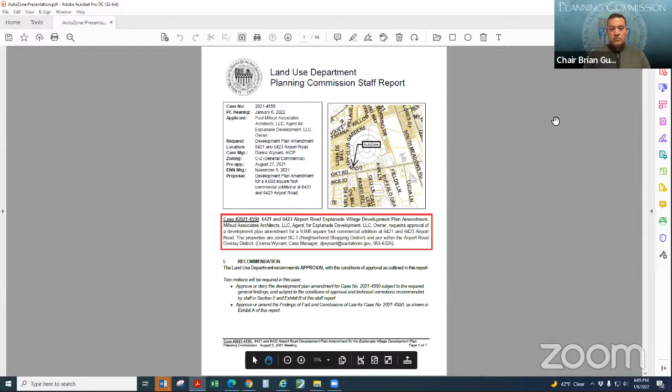Okay, yes, this first case this evening is case 2021-4550, which is 6421 and 6423 Airport Road, Esplanade Village Development Plan Amendment. Mifsud Associates Architects LLC, the agent for Esplanade Development LLC, the owner, requests approval of a development plan amendment for a 9,000 square foot commercial addition at 6421 and 6423 Airport Road. The properties are zoned SC1, a neighborhood shopping district, and are within the Airport Road Overlay District. Staff recommends that the Planning Commission approve this case with conditions of approval as outlined in this report.

Two motions will be required in this case: approval or denial of the development plan amendment for case number 2021-4550, subject to the required general findings and subject to the conditions of approval and technical corrections recommended by staff in section 2 and exhibit B of the staff report. Also, approve or amend the findings of fact and conclusions of law for case number 2021-4550 as shown in exhibit A of this report.

There's only one condition of approval from our DRT on this, regarding bike parking or bike racks. The development plan approval criteria, staff found that these criteria were met; there are 3 of those in the report. So the expiration of this case, should you decide to approve it this evening, is January 6th. That gives them 3 years from the time of final action. If you make that decision this evening, January 6th, 2025 will be their expiration date.

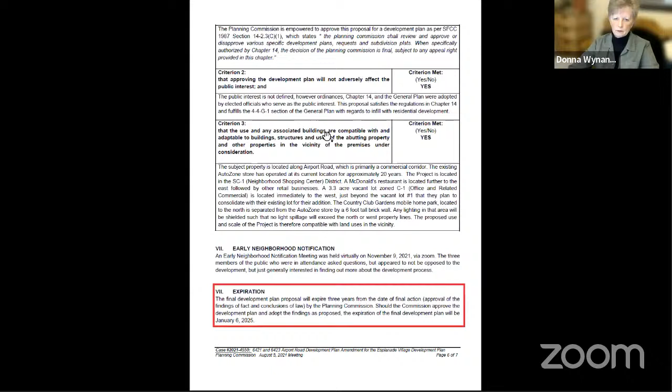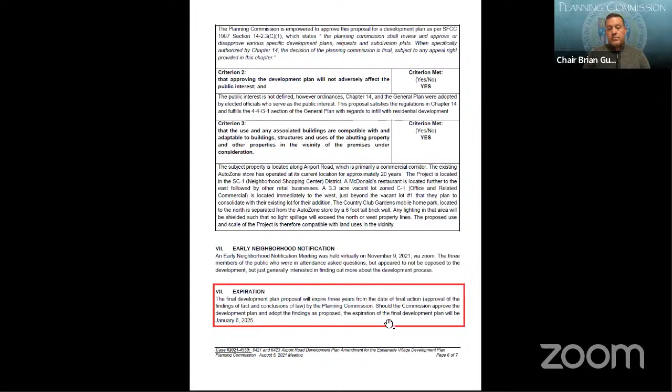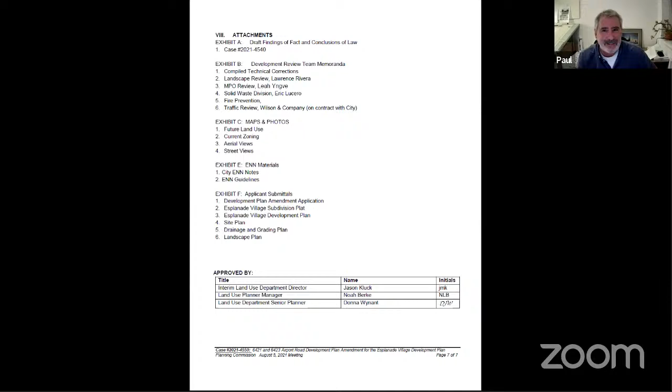I am here. I was kind of expecting my clients to be here also, but I guess they're busy with other things. So as Donna described, this is...

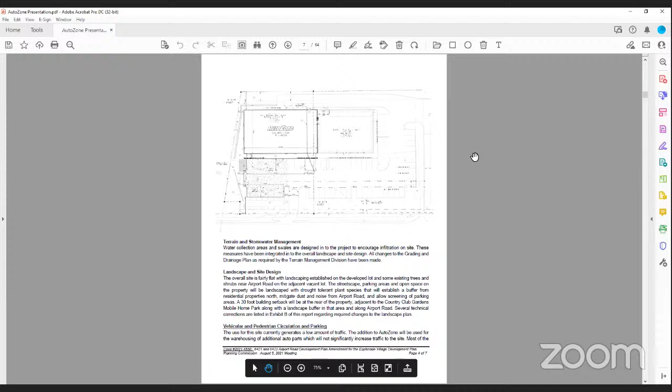It's just a basic site plan of AutoZone. Okay, yeah, this is a bit faint, sorry about that, but if I could just point this out, this is Airport Road and this is Paseo del Sol at the intersection with the light. And you have the new McDonald's over here. The stretch of this development is several properties. It was at one time, when first developed, one shopping center, and then the proposal was to subdivide it because people did not want to be without their own fee simple lot to sit on, and they have joint parking arrangements in between. Essentially, this is the proposal, the existing building here with their existing parking.

You can see it's double loaded here. You come in from the Paseo del Sol that extends up here beyond the traffic light. And so you have this amount of parking. Forget how many spaces that is, but it has plenty of parking. This is the new parking here.

So this right here, there was an attempt with this overlay to try to make it a little bit more unique for Airport Road, to have the buildings closer up to the street. I think there was even at one point discussion on staff, hey, how can we do things really different and not have all this parking in the front, maybe just allow them to have a single lineup of parking. So you see that at some of the new buildings being done along Airport Road, but this is existing. This is proposed here.

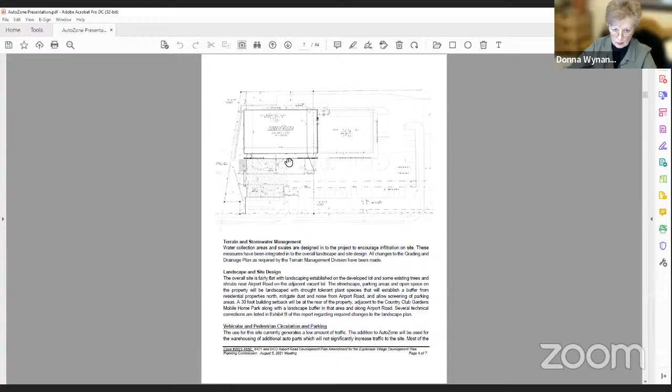And so they have a number of vans that will stand ready to deliver those to people, probably as they're stranded in their driveways or on the road somewhere. They just call and they'll deliver. So I don't know how unique that is. There's probably some other businesses that might do that, but that's essentially the essence of the proposal.

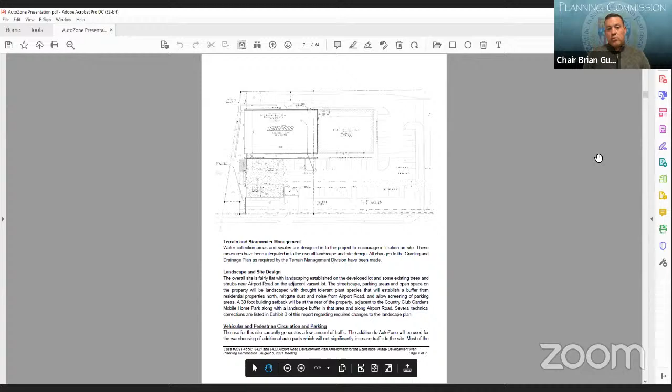Is there anything you have for the entrance, on the westernmost entrance? Right now it's dangerous, and when people miss the lighted entrance, and that one is a right-turnout only, it causes trouble on Airport Road. So has that been addressed?

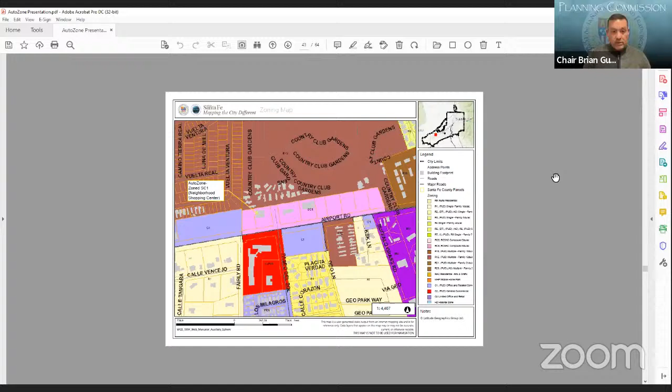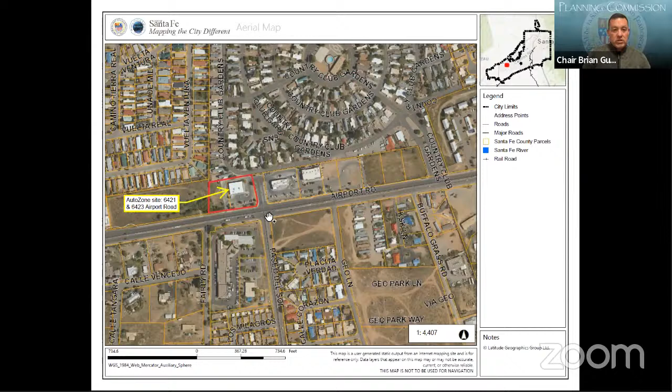You're talking about, can you see this here? This is the zoning map. Yes, we can see it. Okay, all right. This intersection here with the traffic light, it was adjusted some, and I'm not sure what all the issues are. If you go to the exit, which is kind of by the yellow arrow right now. Okay, yeah, that's a problem right there.

Here's a Google Earth shot I did. It comes from a different angle, looking west, bird's eye view down towards the existing situation. So you're talking about this right here? Yes, because that's a right-out only exit. If people miss the light to get into the actual place, they try and go in through there, and it's a safety hazard at this point.

I've seen accidents and things happen right there. So I think that's something that, if it has not been addressed, needs to be addressed. Okay, thank you for pointing that out, Chair.

I think with this median here, it at least closes that off. So if people are going in there, they're coming all the way here and then turning down this, going head on to this traffic here and then down here. Is that what you're saying is happening?

If they're headed west down Airport Road and they pass the McDonald's and they pass the entrance to AutoZone, they're trying to get into the AutoZone. It's designed as a right-out only, but they're still jumping the curb to try and get into the facility and slowing down abruptly, and it turns into headaches and accidents. So with this new renovation, I think that's an issue that needs to be addressed.

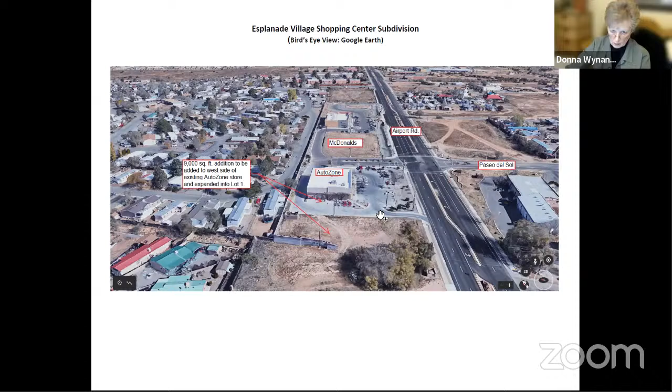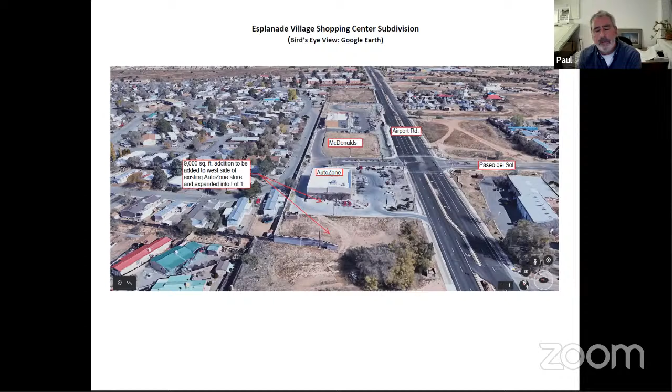Thank you for pointing that out, Chair. This is Paul Minson again. As I recall, that was required by fire and trash, so that they wouldn't have to turn around, so that they'd be able to go in and then get out. And the city traffic engineer required it to be a right-out only and no left-turn in. That's the history of it from 2009.

Right here. Yes, okay, well, it's right here. What you're talking about, yes. Excuse me, yeah, you can see they jumped the curb right where your little hand is, and try and get in there. And it makes for unsafe conditions. So I just want that pointed out for the record.

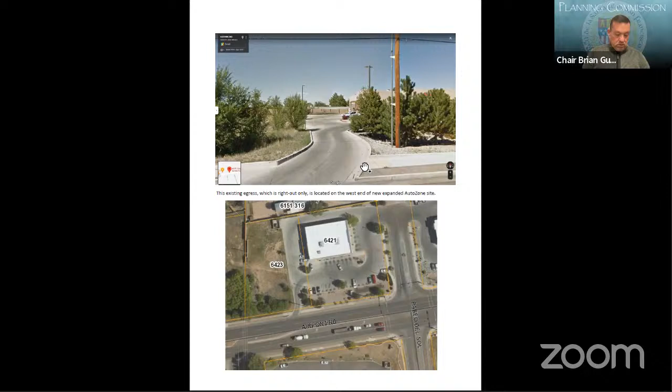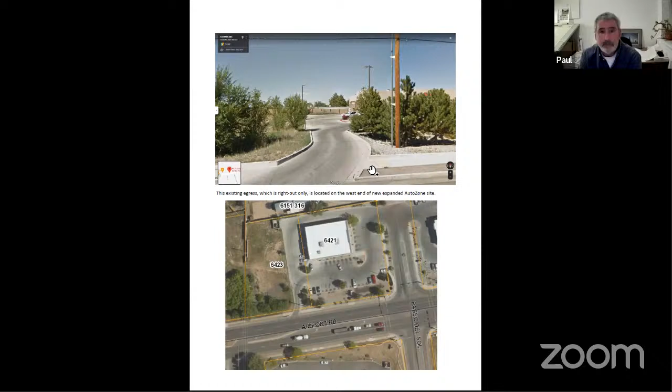I appreciate that, Chair, and I will make a note of it. When this goes through the development review team, the DRT, maybe there could be an exit-only sign there, and maybe something that would physically discourage that more. If it could be addressed, I just want to bring attention to it.

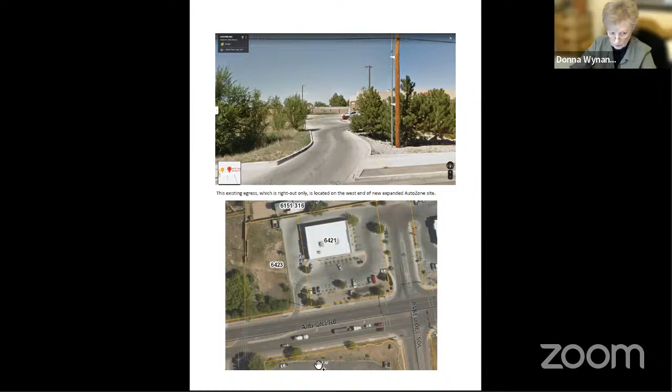I do see one hand up in the attendee room, and it's a call-in. Dan, let me reopen the public hearing real quick just to make sure this isn't for this case, and if it is, let him speak since it's a call-in. This is for the phone number ending in 4950. You will have to unmute your phone to speak. Good evening, are you calling in on this case we're discussing right now? I think it was the other phone number. They're both talking, yeah, pardon me, they're both here. Try star 9 on the telephone, that should unmute you.

We have one that's unmuted successfully, but the one with the hand up is not unmuted just yet. Dan, what's that other number end in? We have a phone number ending in 8043, that's the one with the hand up. 4950 does not have their hand up. 8043, if you want to speak, press star 9 and that'll unmute you.

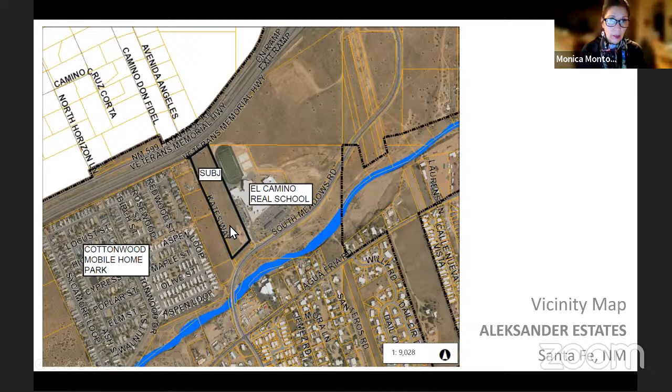Okay, so subdivision design. This is just a blow up of that 8.4 acres of land, and this drawing intends to show you the layout of the subdivision of the 59 lots within the subdivision.

It has a loop, and this loop is designed to access 2 rows of lots. On the east side of that loop, we're going to call that Aleksander Road. This is Kate's Way here that goes up to South Meadows Road, and this will be the front access to this row of homes right here.

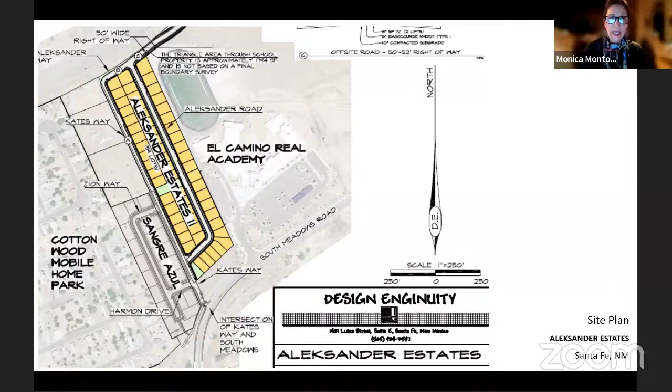Kate's Way presently serves as access to these vacant and partially developed residential lots, as well as Sangre Azul, the main access to a residential subdivision to the west of our project on the west side of Kate's Way.

There will be 2 access points to the subdivision, if you may recall. One is Kate's Way as one access, and a secondary access from the north end, the northeast end of the subdivision, through a small corner of the Santa Fe Schools property and through the 30 acres owned by the state of New Mexico and leased by the city of Santa Fe. This road will be dedicated to the city of Santa Fe for its use in its efforts to develop this 30 acres of property for economic development purposes.

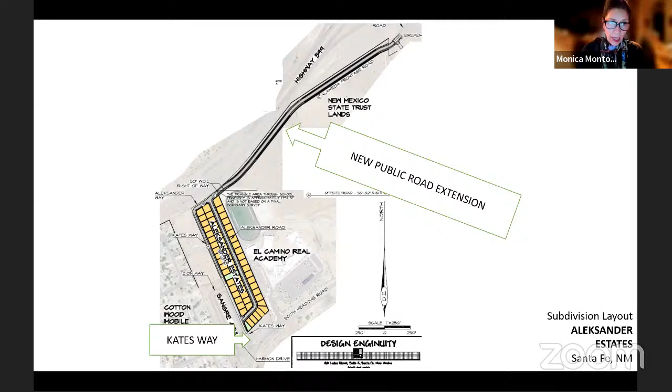So this right up here, this is going to be the connection. We're building this road here to connect to an existing road, which leads to an existing roundabout, the existing South Meadows Road roundabout. I'll show that to you a little bit better on the next slide.

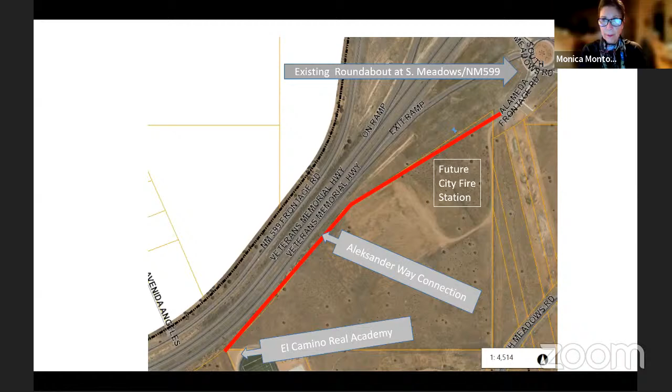We do already have in possession easement agreements with the Santa Fe Public Schools and with the state of New Mexico, and our intent is to build the road and dedicate it to the city of Santa Fe for its use.

So as Donna mentioned previously, there are some staff conditions attached to the design of the project. We've worked extensively with all of your development review team staff throughout the design process. We've made some revisions to the original plans specifically for the city's benefit.

One specifically, we modified the right-of-way design along New Mexico 599 to accommodate a 10-foot wide pedestrian trail, which will be constructed with asphalt. We also modified our design to add a sidewalk connection from the southwest corner of South Meadows Road to our project. We will be extending utilities to one neighbor on the west side of Kate's Way to her property.

And then we will take care of any red line corrections that your staff has gone over with us.

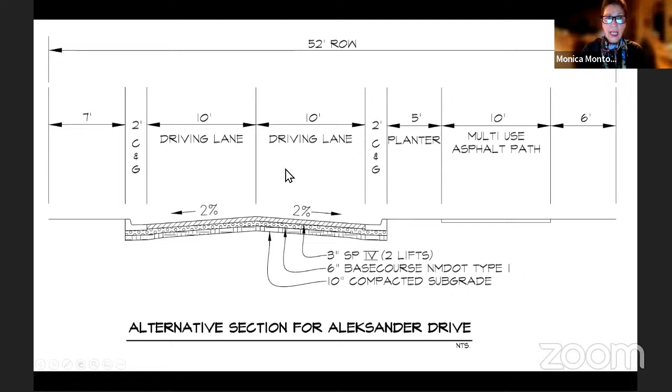So just to show you what that design is going to look like, this section here pertains to the road we will be building parallel to New Mexico 599 in the city of Santa Fe's leased area. You can see here, we've added a 10-foot multi-use asphalt path, which can be used for pedestrians, bikes, or just about any way to get folks through the property for recreation purposes. It'll have a 5-foot planter, curb and gutter, 2 10-foot driving lanes, and a 7-foot shoulder.

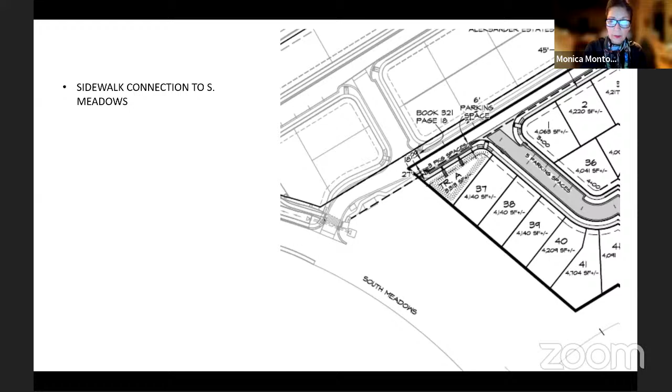And by the way, both of the designs from Aleksander Way, which is the connection through the city property, and the connection on the south that I just showed you, were requests by your MPO staff.

For recreation. So now I'll briefly go over the architecture with you. This will be somewhat redundant, you guys have seen this before, but if you'll indulge me for just a moment, I'd like to show you the type of quality work that Next Generation Contracting Inc., my client, does in the city. You can expect the same here in this subdivision.

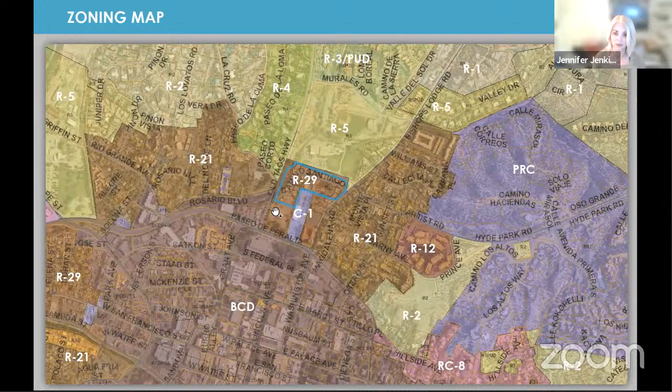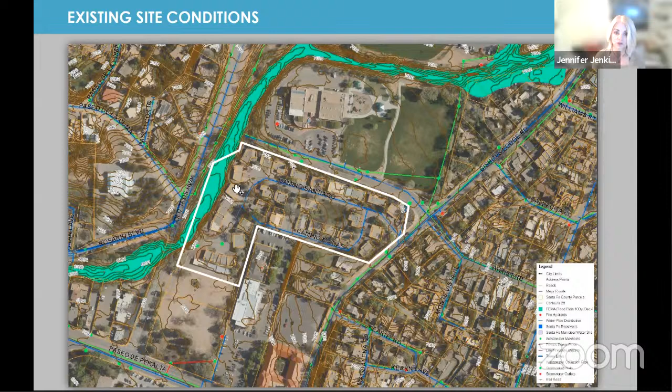This is an aerial of the site, showing some floodplain with the Arroyo Mascaras that moves adjacent to the property on the west. There's an existing public water line that serves the property. The property is also served with on-site private sewer.

These are the existing structures on the 6.6 acre parcel. As I mentioned, primarily detached homes, but there are a couple of duplexes and 3 fourplexes. There's a garage structure here that will be demolished. The demolition of that structure has already been approved by the Historic Districts Review Board.

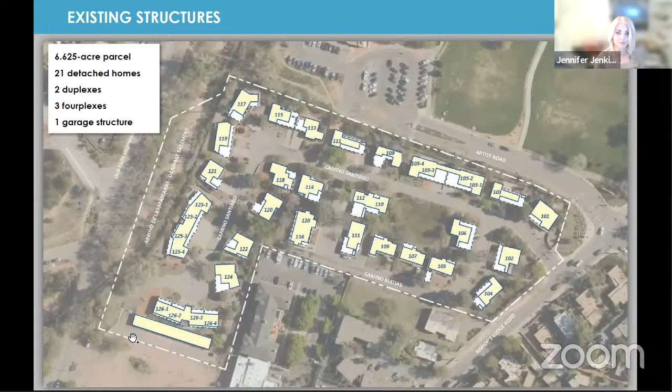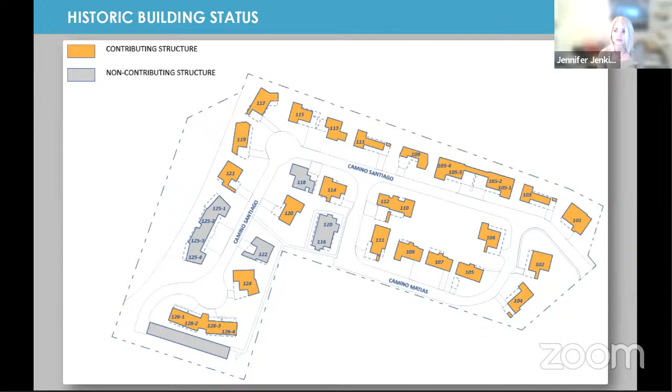The structures shown in gray are considered non-contributing. The renovation of these creates a little more flexibility in terms of how renovations and additions are able to be implemented, but is still subject to the jurisdiction of the Historic Preservation Division.

There is a lot of lovely mature vegetation that we have gone to great lengths to preserve. As I mentioned previously, we have two access points. The main access point is off of Bishop's Lodge Road, and we have secondary access via an easement across the neighboring property to the south, directly out to Old Taos Highway.

We are proposing some infrastructure improvements as part of the subdivision that include a replacement of the on-site private sewer system and improvements to the on-site roadway. We are adding sidewalk improvements.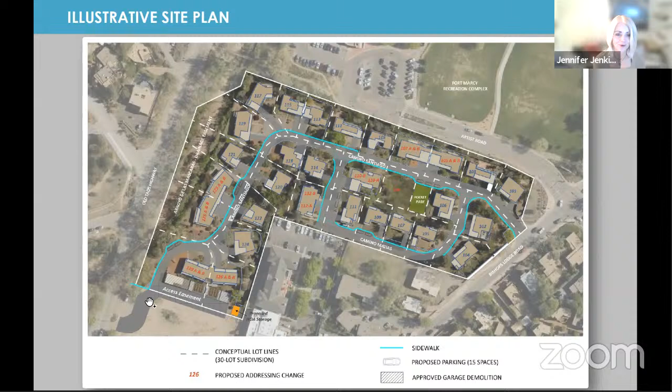So as I mentioned, there are 27 existing structures. We are converting the fourplexes and duplexes, which would be 8 homes that would have an attached guest or accessory dwelling unit, or mother-in-law unit if you will, as part of that dwelling. And then, of course, the creation of the one vacant lot. So we have a total of 30 dwellings.

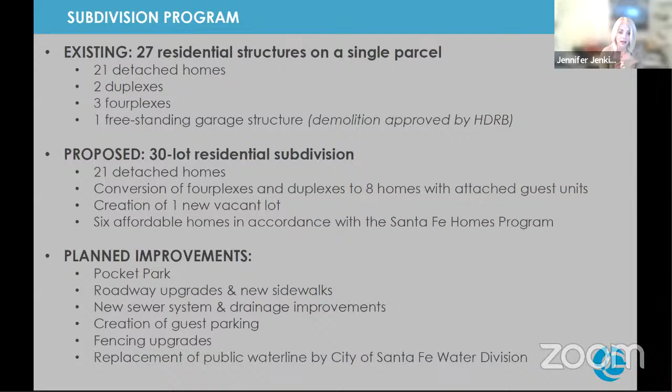And the planned improvements, as I mentioned, are the park, the roadway upgrades, the sidewalks, the sewer system. We also are doing some drainage improvements, the guest parking, upgrading some site fencing. And the City of Santa Fe is actually planning a replacement of the existing public water line on the property as well.

And we are working directly—we've had some outreach already with existing residents. Our goal is to convert as many of the existing residents to homeowners for those who are interested in purchasing a property as part of the project, and also really specifically with the affordable homes.

I was just exchanging emails with a resident earlier this week. We invited and encouraged everyone to reach out to HomeWise and the Santa Fe Community Housing Trust here in town to get pre-qualified to see who could qualify for potentially acquiring one of the affordable homes. So we are really excited about those opportunities.

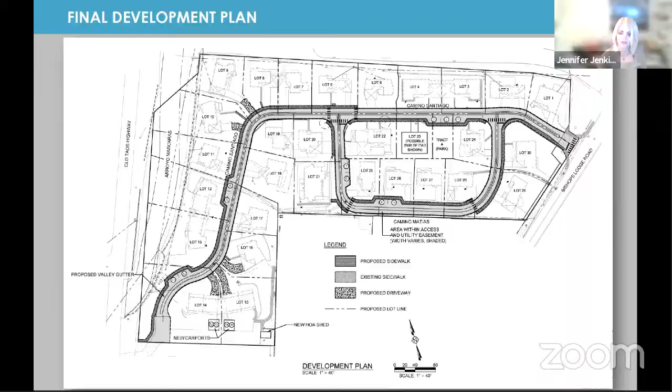And that's really it. These are just the plans out of the submittal itself, which I can go through, but I'll go ahead with the presentation there. And again, I'd be happy to stand for any questions.